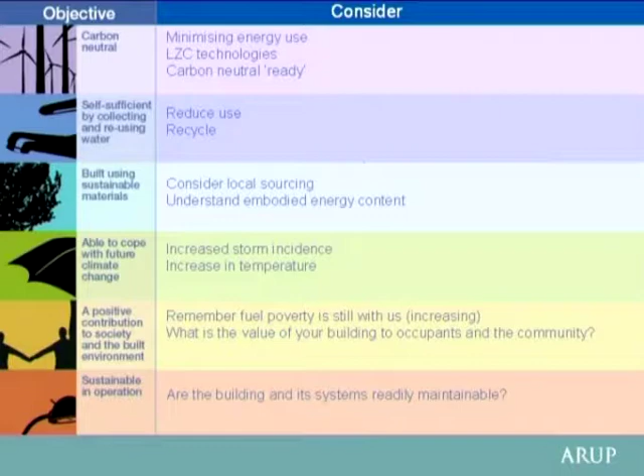So, as I say, in terms of buildings, this slide is showing a framework that we use when we're talking about buildings in particular. So, for buildings, things like designing now for low and zero carbon energy technologies, reducing water use, making buildings more adaptable to climate change by introducing more thermal mass so we can use passive cooling, etc., etc. We do that stuff quite well. The challenge that I see is how we take that, as I say, beyond the buildings to other areas. So, building techniques and getting mass and getting the daylighting and all of that working in a good design team does work well.

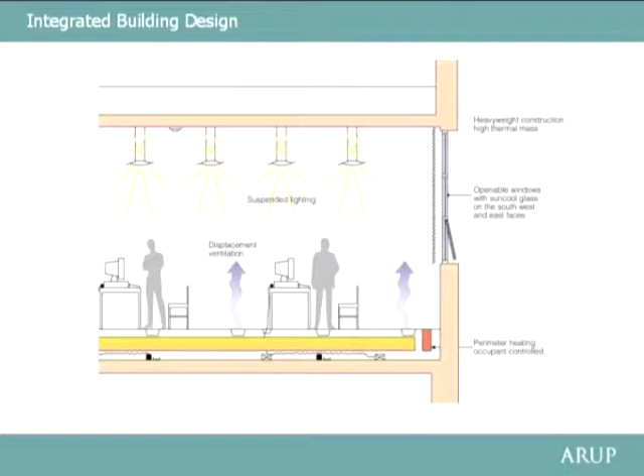Bob also mentioned that legislation will increase. We've got the Energy Performance Directive coming out of the European Union, and the need now for all buildings to have energy performance certificates. And there's also now the Code for Sustainable Homes. What I'm nervous about in building terms is that design teams, clients, and other people think, right, I've got my energy performance certificate, I've got my code level 6 house, that's it, job done.

In terms of sustainability, yes, these things are great, will force great strides in the right direction, but they don't cover the full spectrum of what sustainable development is all about. So I'm nervous, as I said, that people will think, I've got my certificate, I've got my code level 6 house, that's it, I don't need to do anything more. And they don't think about all the other lifestyle issues to do with where our food comes from, how many miles people drive, the kind of cars they drive, and all those sort of things. So, it's dangerous just to think that you've done what the legislation says and that's it.

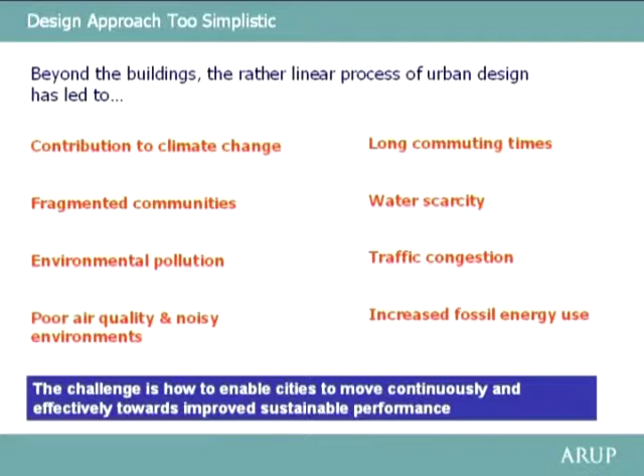And as you know, this sort of rather linear process, I think, of urban design has led to a whole series of issues, whether it's people sat, as I've seen in Moscow, in their cars for 2 hours because they haven't been able to have a car for the last 50 years and now they can afford one. They're prepared to sit in a traffic jam in Moscow for 2 hours on the way to work, and they're prepared to sit there for another 2 hours to get home again because they can own a car.

It's led to fragmented communities, water scarcity, environmental pollution. So all those kind of issues that were mentioned earlier today are really a consequence of a very unsustainable approach to urban design. So the challenge, as I said at the bottom there, is really how can we change what we do now and make things better and start moving towards a more sustainable world.

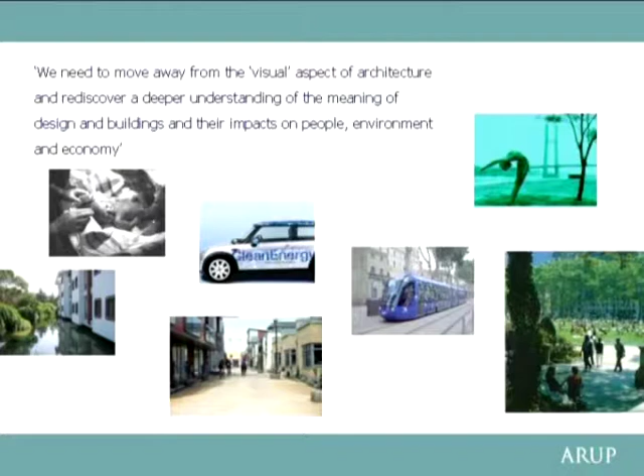I think, again, over the last 15, 20, 25 years, maybe more, urban design and architecture has been more based around, I mean, this is a huge generalisation, I accept, but it's more based around the visual aspects of architecture, what the buildings look like, and there hasn't necessarily been a deeper understanding of the impact of the buildings and the people and the process of those actually on the planet. So we kind of need to rediscover that, the impact of us as humans on the planet, and design and act accordingly.

I say rediscover because it isn't really new, and Corbusier back in the 30s had sort of seen the future in a way when he stated then that trains, Pullmans, metros, cars, roads, and the administration of it all, the personnel required to run it, maintain it, repair it, and police it, that is the stupid waste of modern times. So he was seeing the motor car and other forms of transport are heading our way, and that's going to be one of the huge problems that we face.

Just by way of background, really, to say that we do need to be doing things better and more cleverly and in a more integrated way. And we need to do that. Whilst we're doing that quite well for building design, in our master planning and urban design, we need to be doing those things better. And I'm just going to run through the kind of process that we try and apply when we're working on these broader scale projects. I guess a key issue from the outset is to define what sustainability means for your project.

In terms of how the master plan responds, in terms of mitigation, yes, it's all about your energy strategy and low and zero carbon energy sources. Transport particularly, not just in terms of the emissions of the vehicles, but fundamentally reducing the need for people to travel. And in terms of adaptation, it's, as I said, things like designing for more severe weather patterns and thinking about what that means for your buildings and people like the young and the old who are particularly sensitive to extremes in weather.

I think historically we've tended to stop at that point. The master plan's drawn, we've got some fantastic drawings of where the buildings and the roads and everything is going to go, we get a planning application and then off it goes and it gets built. And what we forget is that after that, when this new town, city, whatever it is, is actually being operated, people are fundamentally living their lives there, the whole governance strategy and the way that these places are operated and run needs to change too. We can't continue to govern our cities in the way that they have been if we want them to be operated more sustainably.

So really it's important to think about how this new area of master plan is going to be governed and run at the time you're designing it, and start making sure the local authorities understand what's really heading their way and how they're going to need to change things. And that happens whether it's, as I say, in the West End of Newcastle, where we're dealing with the city and talking to them about adopting new systems for drainage and sustainable urban drainage systems, or whether it's a whole new city in China and the local authority in Shanghai thinking, bloody hell, how the hell are we going to look after this and even deal with the planning application, let alone anything else. The governance issue and how these more sustainable cities and towns are run and governed is a key issue.

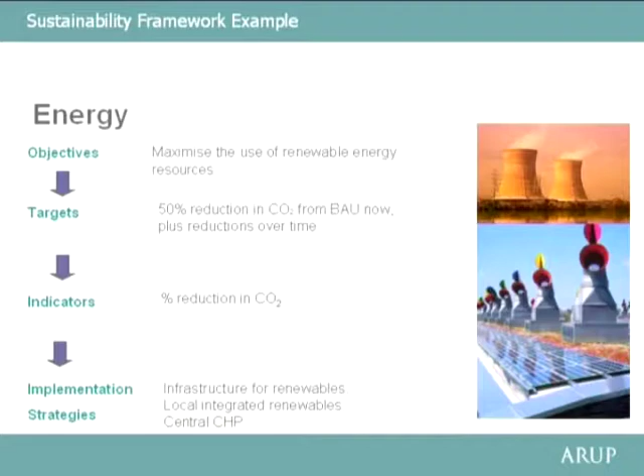Again, another quick example in energy terms, how it might run. So in terms of the energy strategy, you may have an objective, quite a sensible one, to actually maximise the use of renewable energy resources after you've done everything you can to reduce the need for energy. So the target may be something like, say, a 50% reduction in carbon dioxide emissions from business as usual now, plus the ability to continue to reduce your CO2 emissions over the next 20, 25, 30 years. Now that's only going to happen if you design in the adaptability and flexibility to allow those things to happen.

And then looking at indicators, and then the implementation strategy of whether it's combined heat and power or wind or some other renewable technology. So a very simple process, but often it just doesn't happen. We just default at the moment to plug it into the national grid and do business as usual. That's developing an energy strategy.

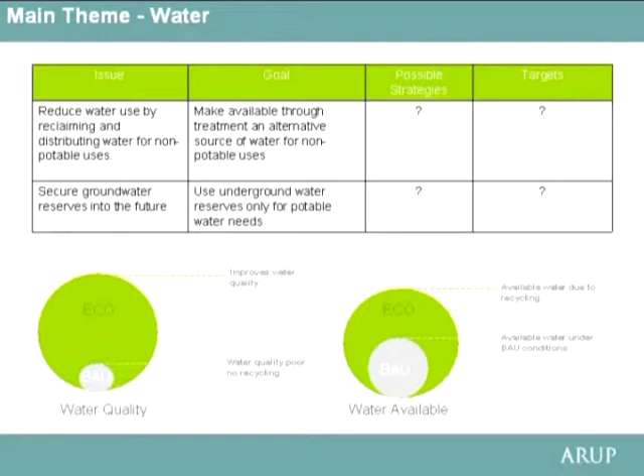And then coming back to the governance issue. As I said here, for the Moscow project, in the early days of that, we already raised the issue of governance to our client, and the fact that they will need to develop new governance strategies to develop or to run this new part of the city in a particularly rapid way, but in accordance with the Sustainable Development Principles.

In terms of assessing performance now, we've got tools over the last 5-10 years that have developed massively and are very complex, and we're able to look at the interactions of the various parts of the city system, if you will, and look at resource flows between the different areas, whether it's energy, water, people, how the buildings are built, etc., and start putting metrics and numbers to these things.

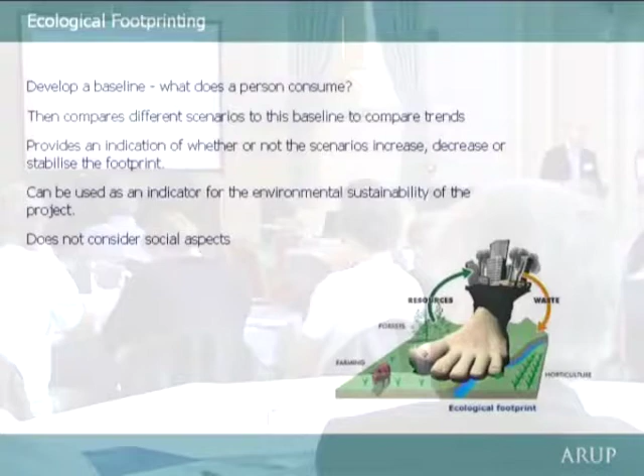Bob mentioned earlier the concept of ecological footprinting, and we can now be using that actually as a design tool. So you can develop a baseline for business as usual. What would a person living in any country normally consume? And then what we need to do in terms of master planning and design and land use to start reducing their use of resources.

So looking at a range of cities and countries, as cited in some examples earlier, we go from the likes of China at the moment, where on average, albeit it's changing rapidly, an average citizen is living within their fair share of resources, all the way through to, on the right-hand side of the scale, people in Houston in Texas, because of their urban density and houses are so spread out, everybody needs to get in a car even to go and buy a newspaper.

They've got an eco footprint per person of 12 hectares. The fair share of resources is between 1.8 to 2 hectares. So if everybody lived on the planet like they do in Houston in Texas, we would need 6 planets to live on.

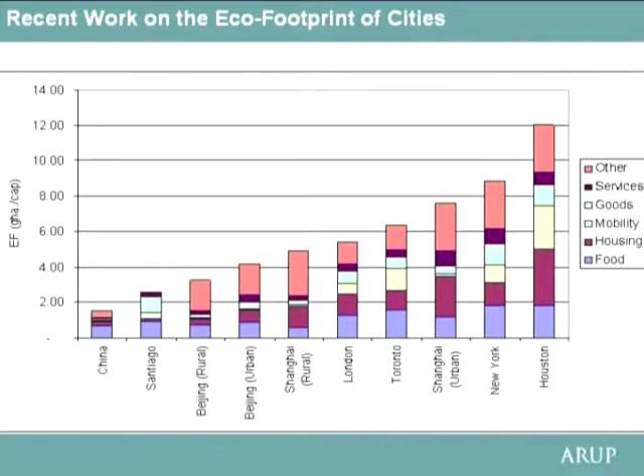So having these tools actually in the master planning process, because it breaks down the footprint into the effective land area needed for food and for housing and for transport, we can actually start looking at different land uses, how much housing, how much industrial, how much office space, how much area given over for food production, etc., and start changing things around in the design process to make sure that we can reduce the likely global eco footprint of the people who will be living in this new development.

We've worked with a series of experts in the firm, whether it's our master planners, urban designers, our energy experts, and what have you. We've kind of worked out this approach over the last few years, really, in response to our clients' demands for more sustainable design.

But in a way, there's nothing new. There's this technique of backcasting, when rather than just predicting where you're going to go and ending up there, you actually decide where it is you want to go and then work backwards to say, right, what do we need to design, what systems do we need, etc., to make sure that we get to where we want to go. It is a recognised system.

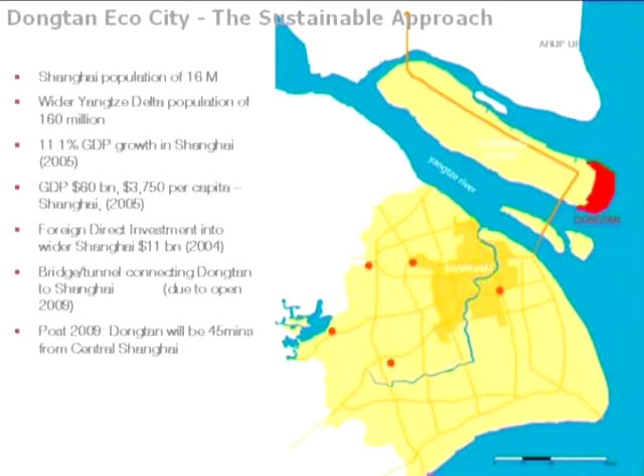They had several design competitions, master plan competitions, that ranged from ideas of garden cities through to the other extreme, high density super tech cities, but there was nothing that really grabbed them. They liked bits of various things but weren't convinced that any of the master plans would actually give them what they wanted. So we were lucky really to win a commission to review the last master plan they had, do a critique and start defining for them what an eco-city or a sustainable city should be, or what it should aspire to be.

So the whole site is something like 86 square kilometres, and over the next up to 50 years, they're looking for development there that will provide homes and jobs for around 400,000 people. Just to give you an idea of the speed and how much they're expanding. As I mentioned earlier, our client has been quite enlightened in that they realise that China can't continue to develop the way that it has been, and they do need this new ecological imperative to do things differently and more efficiently.

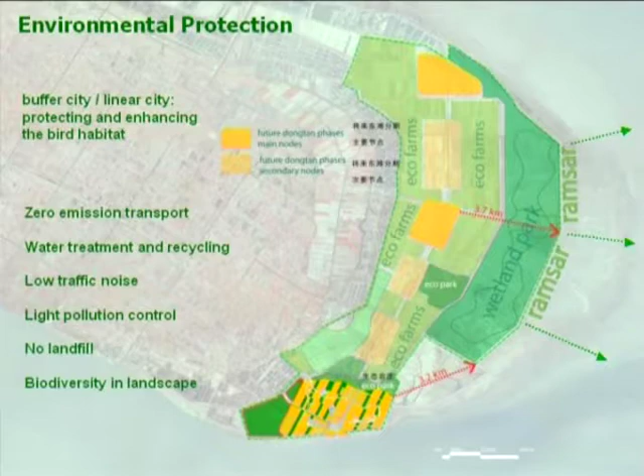Previously, a lot of their master plan work has been based around having large areas of housing in one area, an industrial part of the city over here, huge 5-6 lane motorways connecting everything, and communities become fragmented and the whole social fabric falls to pieces. So they really wanted something different here. This is the site at the east end of the island, and one of the main constraints was the fact that there's an internationally recognised wetland here for migrating birds going to and from Siberia and Australasia. So there's a very significant environmental constraint on the site.

In the early work we did with the client, we developed this idea of an eco-city, and basically went through each of the components of the city and identified targets and the kind of design process we should go through to get this new city to work in a more sustainable way. So we ran a series of workshops out in Shanghai, went through the process I described earlier, set out a series of objectives, and from day one the client made it quite clear that they wanted to be at the far end of the spectrum: their vision was to be a global market-leading eco-city. So they were all about 100% carbon neutral buildings and transport from day one. That was the design brief. So it was quite a challenge that was set.

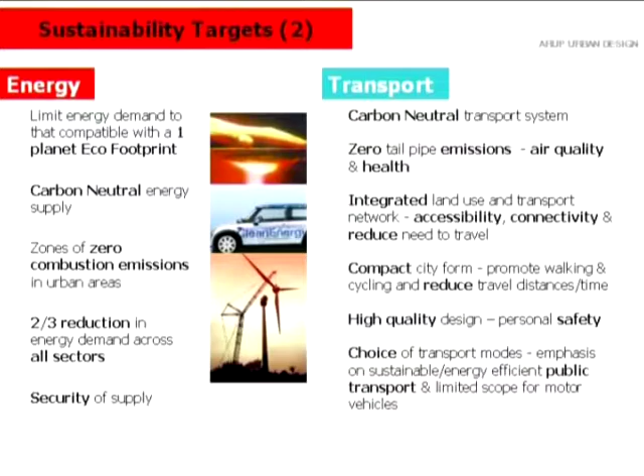We produced a series of initial sustainability targets to do with having the right land use mix to provide job opportunities. So it wasn't just all about housing, it wasn't just about having a university site, it wasn't just about commercial offices. So a range of targets for social economics. In terms of energy and transport, as I said, the client wants the city to be carbon neutral from day one. So to get anywhere near that, it needs a huge reduction, a 2/3 reduction in energy use from business as usual in China, Shanghai at the moment. The same for transport: carbon neutral transport system, zero tailpipe emissions, etc. So there are some very, very demanding targets.

Similar on the water side, big reductions in water use, so designing water efficiency into their buildings and irrigation and everything else is critical. And on the ecology side, because of the wetland on the eastern edge of the site, we developed a strategy with 3 zones: a critical wetland area with absolutely no development whatsoever, then a very wide buffer space where there can be limited development of very low key eco-tourism visitor facilities, and then the actual urban area itself. These numbers are things that designers can actually start designing to, and you can check what is the area of green roof, what is the area of landscape park and everything else. If you set targets at the outset, you can continually refer back to see whether you're achieving them.

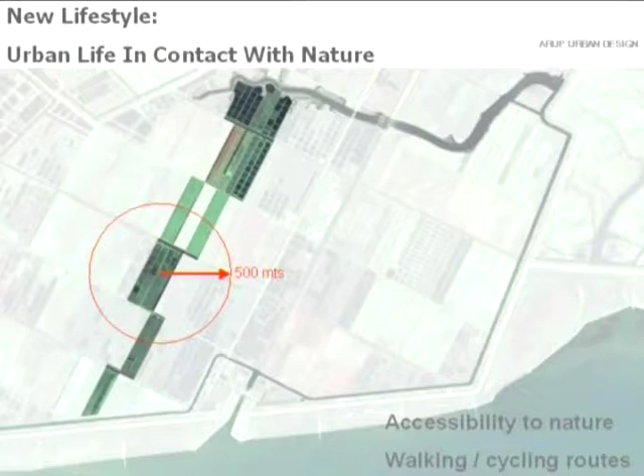So we've set out some fairly simple, straightforward design principles, with things like making sure that everybody lived ideally within 500 metres of a park or somewhere they could go out, walk the dog, go running and what have you. And the drawing there shows an existing field structure which we didn't want to change and get involved in huge earth movements to re-engineer the whole site. So from the outset, we worked with the site as it is, used the existing field structure and started joining the park areas up together, so they work from an ecological point of view.

So really, before there were any roads or buildings or anything else, we started with the green spaces and made sure they work and are joined together and link with the surrounding area. Then we started looking at the building plots and how the buildings might work in terms of orientation and whether they work within this 500 metre long urban block, really making sure they work from an orientation and shading point of view. Lots of analysis of sun path.

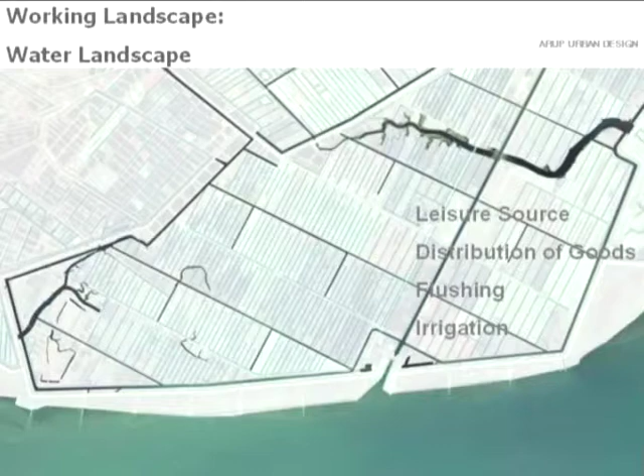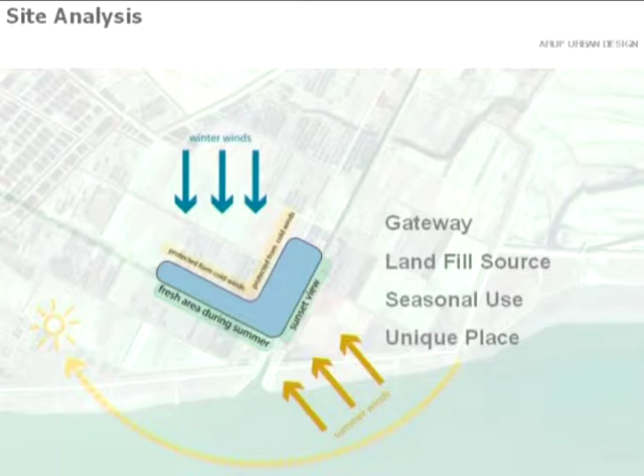There's also an existing water landscape of existing rivers and canals, which again we don't want to change significantly, albeit designing around water features and having a fairly large water feature in the middle provides a central hub for this first part of the city that we started to design. And because people generally tend to like to live near water, that starts to improve land values, puts greater value on the properties, etc. So just some site analysis looking at sun paths and developing the water infrastructure that was there to really improve the value of the site.

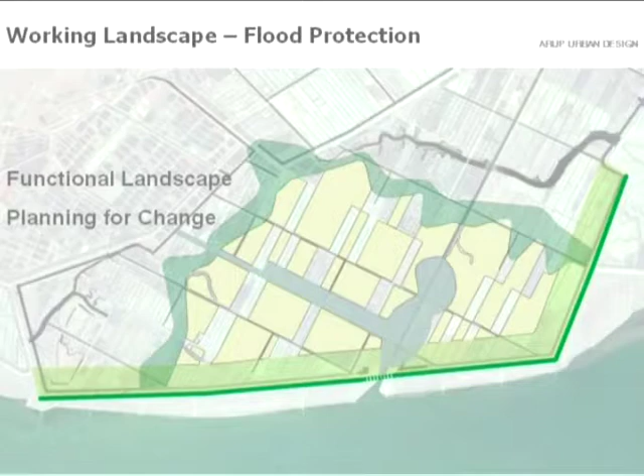Shanghai is probably one of the 5 or 6 top cities in the world at risk of flooding. It's a fairly low-lying area. The risk of climate change, increasing sea level, and the impact of typhoons and storm surges is quite significant for that whole region. So having a flood risk strategy, flood protection strategy was a key part of it. And we developed a series of flood cells. So this first part of the city is designed around 3 main villages, each within its own flood cell, and then there's a large flood protection barrier around all 3 of them.

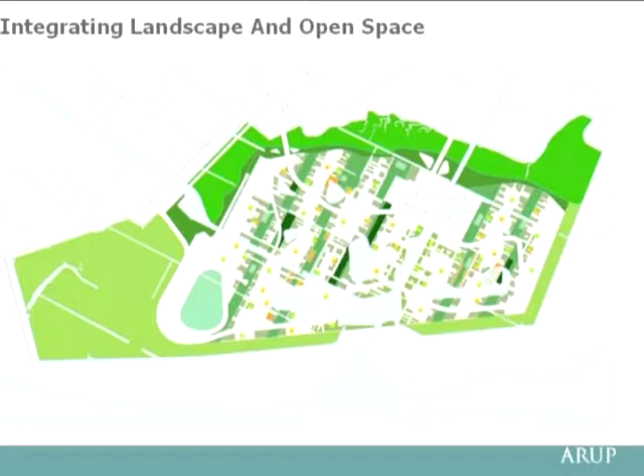So then, starting to get into a bit more detail, looking at how the green spaces work in the landscape. There's a series of interconnecting parks, but then there are also private gardens and green routes. So the green space network works throughout the city to allow certainly not huge hordes of elephants to wander through the city, but smaller animals and birds, rather than just having pocket handkerchief parks that are of no great ecological value. Having them joined together spatially really improves the ecological nature of things.

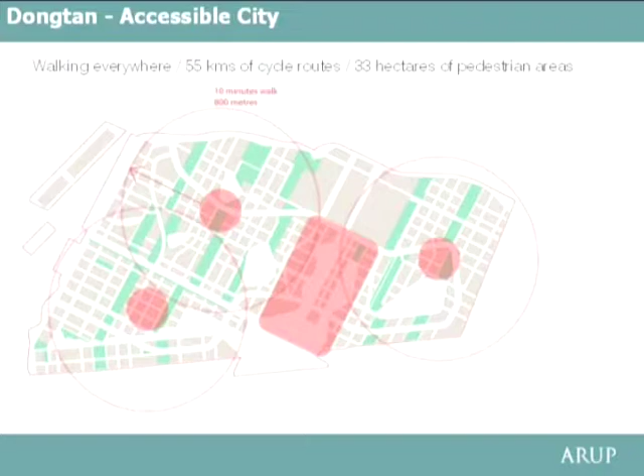Looking at the land use, making sure we've got a diversity of commercial space and residential and workplaces, so people don't have to travel too far. Looking with this three village concept and a town centre, making sure that within each of the 3 villages, everybody can get to the main resources they need, whether it's the library, the doctor, the local shop to buy a newspaper. All of those things are within, ideally, 400 to 500 metres, and in some cases out to 800 metres or around 10 minutes walk. Again, looking to reduce the need for people to travel and to jump in their cars and go anywhere.

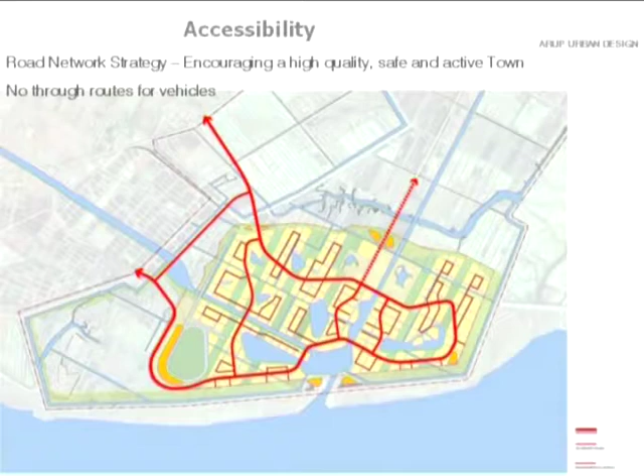We then start overlaying the more technical aspects to do with the road network and infrastructure, making sure there are public transport stops, ideally within 5 minutes walk of people's homes, to try and encourage them to use public transport and not their own cars. And thinking about new ways of designing our road networks. In the UK, we really struggle with rat runs: when the main roads are blocked, people start going through local neighbourhoods and streets where the kids are playing. So trying to design the access network in a way to discourage people from just driving through and keeping them to the main roads is a real issue from a social point of view, making sure our local neighbourhoods are safe for children and people to be outside.

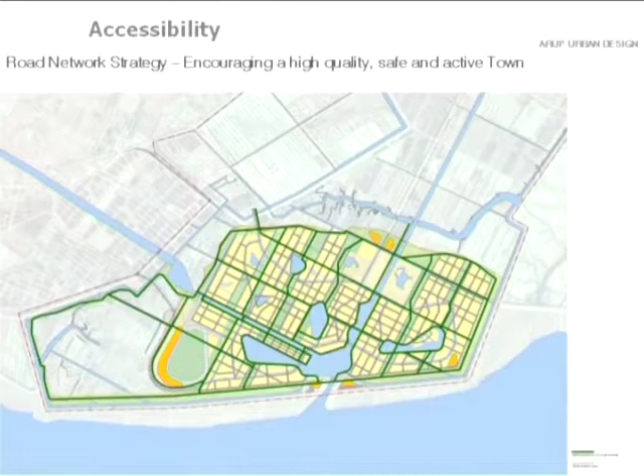The main pedestrian cycle network, certainly trying to keep that separate from some of the larger roads where we've got public transport, and getting people to have access to green spaces where they can walk and cycle along the side of water features.

From the energy side, we developed a strategy with a principal energy provider coming from a combined cooling, heating and power plant, which uses biomass. So the waste from the rice industry locally, all the husks that come off the rice plants, are contained and barged to the site and then burnt, which is used to produce heating, electricity and cooling. And that's done in combination with a small amount of anaerobic digestion of waste and some large

wind turbines. Just a few numbers at the end here, really trying to summarise what we achieved over the business as usual case. So in terms of density and the amount of jobs, which I keep banging on about, reducing the need for people to travel.

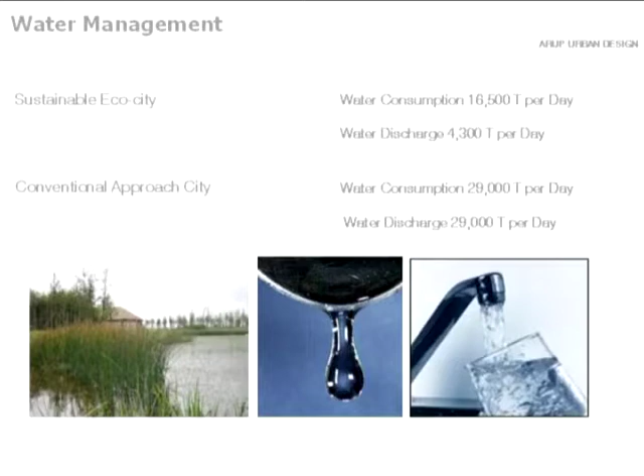In terms of water consumption and water management, again, we've reduced both the consumption and the amount of foul treated water that goes off the site from the business as usual approach, through water efficiency measures, doing things differently, collecting rainwater and reusing that, etc. In terms of reducing emissions, firstly, huge reductions in energy demand because of improved buildings, better levels of insulation, more efficient energy generation methods, and the use of renewables, so huge reductions in CO2 emissions.

Waste management. At the moment, there are very good levels of waste recycling, really out of necessity, across China. So I guess we're trying to build on that idea and that practice that is in China at the moment, and just try and make things better, improve waste collection and recycling locally.

In terms of transport, we recognise that in the early stages, there's no question people will be living there and commuting backwards and forwards to Shanghai, and that's really unavoidable. But over time, 5, 10, 15 years, as the city develops more, there will be less of a need for people to travel away. They can live and work more locally. So over time, the number of trips people make should reduce, and there'll be an equivalent reduction in carbon emissions, pollution, improvements in air quality, etc.